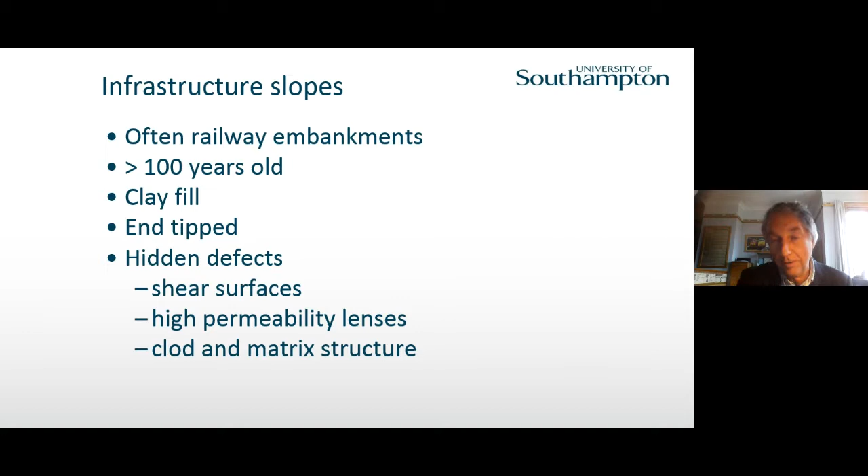They're often just end-tipped, so they were never compacted or built in layers or anything like that. And they have hidden defects, which could include shear surfaces, high permeability lenses or regions. And they also have what we call a clod and matrix structure, which I will illustrate in just a couple of slides' time.

Now, very often the material that had been excavated is dug up in clods. So the structure of the embankment often comprises these reasonably intact lumps of clay, pretty much as dug up. But over time, that can soften and swell at the edges. So you end up with the lumps of intact clay sitting in a kind of sea of what we sometimes call matrix material, which is generally softer and possibly wetter.

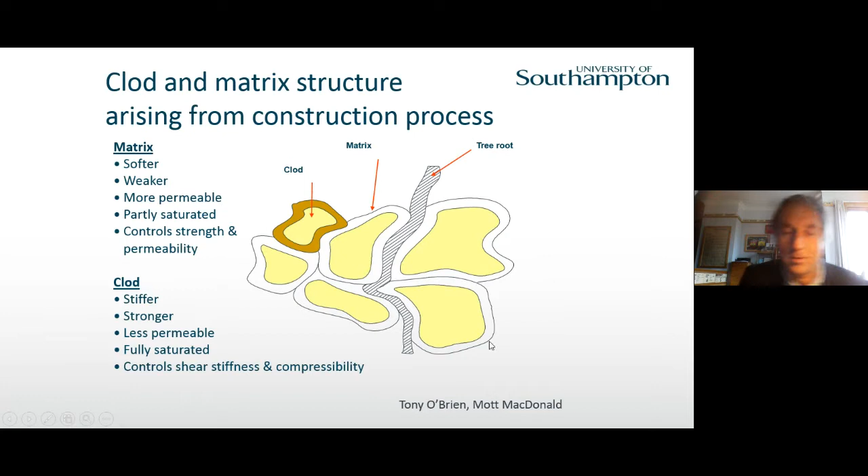It can act as a conduit for fluid flow, so that can be a high permeability zone, and also tree roots will tend to preferentially penetrate through the softer matrix material. I think this terminology was first developed by Tony O'Brien from Mott MacDonald.

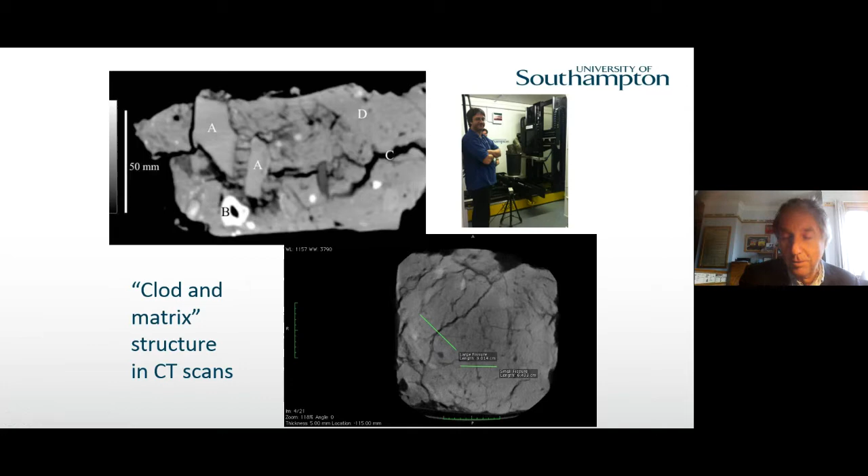So that makes some sampling and characterization of the material quite difficult. That's my colleague Ian Sinclair, who operates the big scanning machine, which is used to investigate the structure using CT scanning. So it's reasonably well known - work's been done at Imperial College and elsewhere, looking at progressive failure and deep-seated slips.

This is a classic slope failure, where an embankment slope or a cutting slope that is over-steep can develop what's sometimes called progressive failure. What happens is where the clay material exhibits a peak strength, some of it becomes overstressed, and as the material continues to strain, it loses strength, which means it sheds load onto adjacent bits of material.

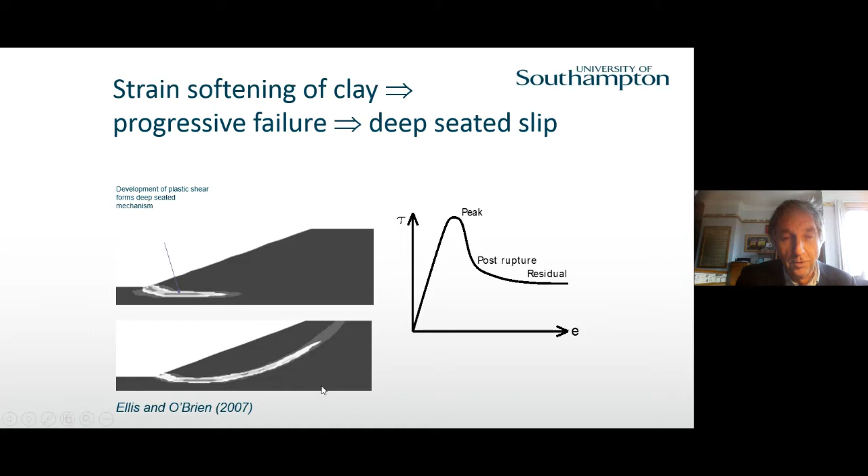So over a period of years, with small movements, we can see that a slip surface will gradually progress until eventually we've reduced the strength because we're beyond the peak across the whole of the rupture surface, and at that point you can begin to get a failure.

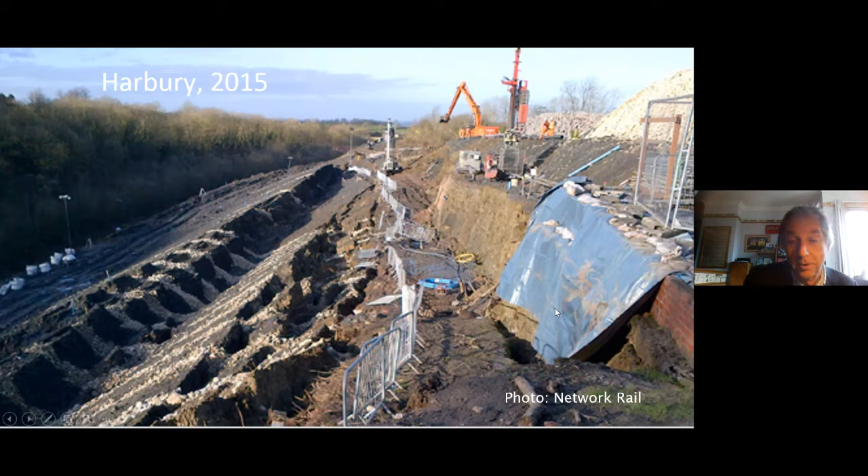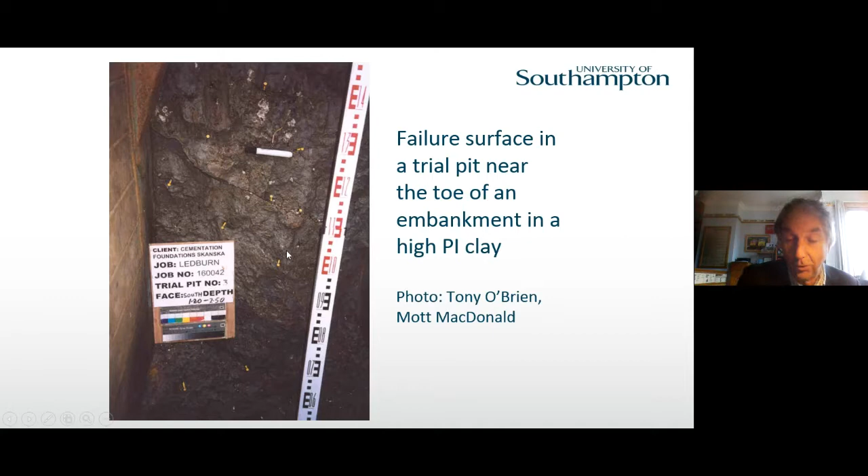This is from a trial pit near the toe of an embankment in high plasticity clay. Again, we can see there is a failure surface, which could well be a residual surface. Whether that's still active or not is not necessarily clear. So we end up with all of these internal flaws and structures within these clay fill embankments.

Those classic failures are reasonably well known. I think what is now better known than it was maybe 10 years ago is that with seasonal variations in weather patterns, but especially in the uptake and evapotranspiration of water by vegetation, what we see are potentially very significant variations in the water content of clay soils.

So this is some data from a cutting in London clay on a road at Newbury for the Newbury bypass. It covers a period of about 5 years, but in fact we've got about 15 years worth of continuous data on this site.

This shows the volumetric moisture content as a function of time, measured by time domain reflectometry theta probes, at different depths. What we see is that with the shallow ones down at 0.3, then 0.45 and 0.6 meters depth, we get these cycles of seasonal drying during the summer and wetting during the winter.

That effect reduces with depth. At the deeper ones, 0.9 meters and 1.5 meter depth, we're not seeing too much of the effect at all. But certainly over the top meter or so of soil, and this was a grass covered slope, we're seeing generally very significant drying out in the summer, then wetting up in the winter.

And then you can start to see that not all years are the same. So we had 4 years here where there was quite a significant drying out in the summer, but then a couple of years where the summer drying didn't really happen. They were probably not particularly great summers back in 2007 and 2008.

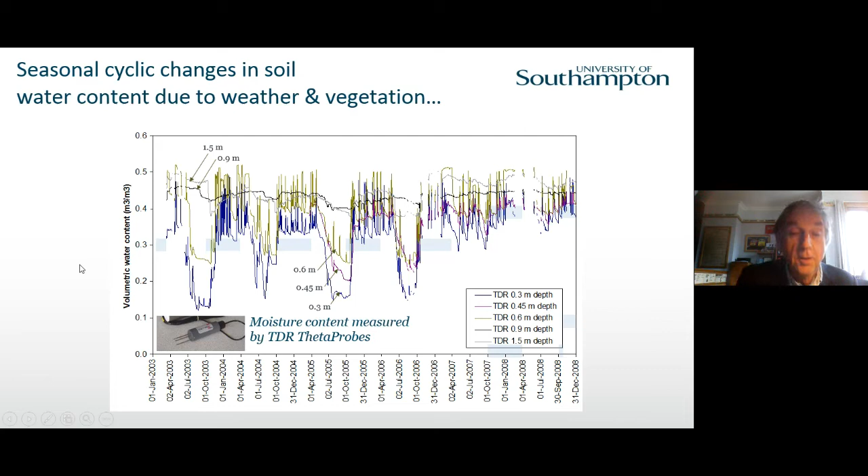So the problem with that kind of shrinkage and swelling is that while it might not cause imminent collapse of the earthwork, it is a real operational nuisance.

So even though it might not be an issue in terms of causing immediate failure, that seasonal shrinkage and swelling is very problematic. Certainly on the Wessex route down from Waterloo to Southampton, over the past few years, there have been summer speed restrictions as a result of seasonal drying out and disturbance to the top of the railway line. So it is very much a nuisance.

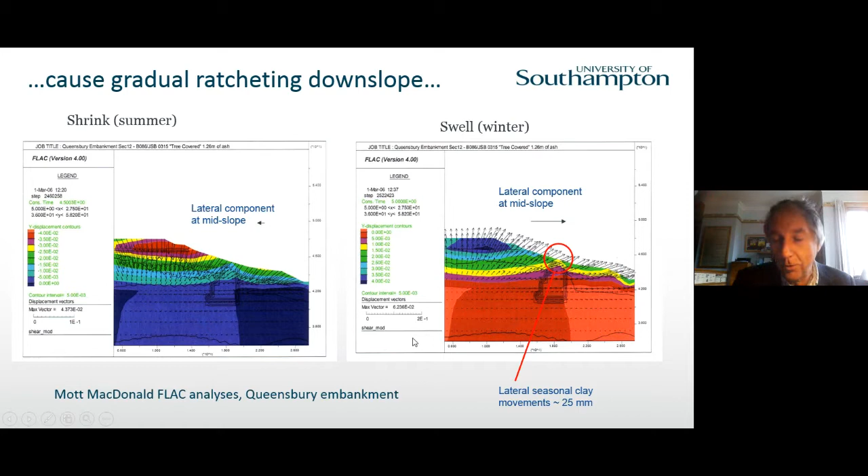During the summer, we tend to get predominantly downward movement with a very small lateral component inward. But then in the winter, when the embankment wets up, it tends to have a higher component of lateral movement, so that the downslope movement in the winter is greater than the upslope movement in the summer. So we end up with this gradual sort of ratcheting of the slope potentially down the hill.

And of course, in the summer we tend to have low pore water pressures. In the winter, when the vegetation is not taking so much moisture out of the soil and the water content is higher, that's also associated with higher pore water pressures. And as we all know from soil mechanics, that means it's quite damaging for the stability of the slope.

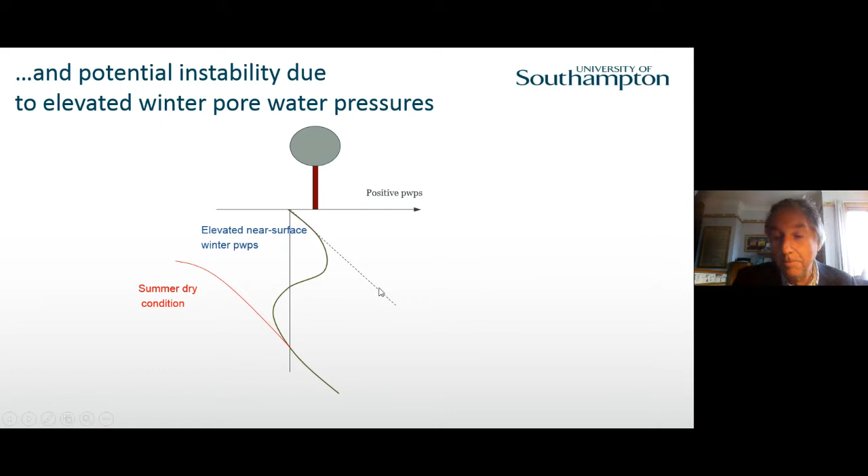So there is also the possibility that these elevated pore water pressures in the winter, with the water table near the surface, could trigger a slope failure, such as the ones that we saw on the earlier pictures.

So the first piece of work that I'd really like to go into in a bit more detail is some work that we did looking at the wet winter pore water pressures. In some respects, just getting a handle on all of that long time series data from Newbury and from other sites is important, because you can begin to see what kind of variation we get.

And you realise that not all winters are equal. The worst condition is where you don't get the drying out in the summer. So you would have, for example, a wet summer, a wet winter. Then if you have another wet summer and another wet winter, you start to get really quite onerous pore water pressures in the earthwork.

So this is just a reminder, this is the Harbury failure, that high pore water pressures reduce the stability of the slope, so we can get the failure that we've seen here.

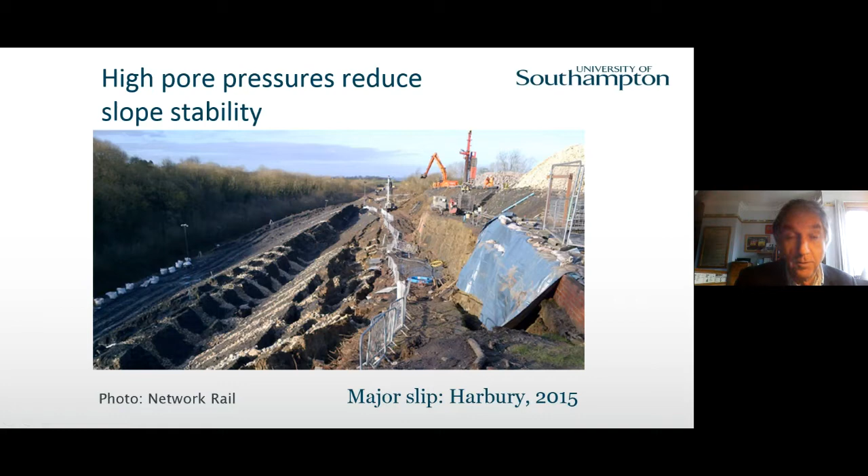These are pore water pressures plotted against depth. These were measured by Andrew Ridley in a number of London Underground embankments, in the wet winter of 2000-2001. There's a variety of different sites, and it's just the maximum recorded pore water pressure as a function of depth below the clay surface.

If you look at all of the data, it looks like a bit of a measles plot. But if you had to put a worst case through that, you would say it's hydrostatic. So in fact, the London Underground default pore water pressure conditions in an embankment in the winter is hydrostatic below groundwater table up at the surface.

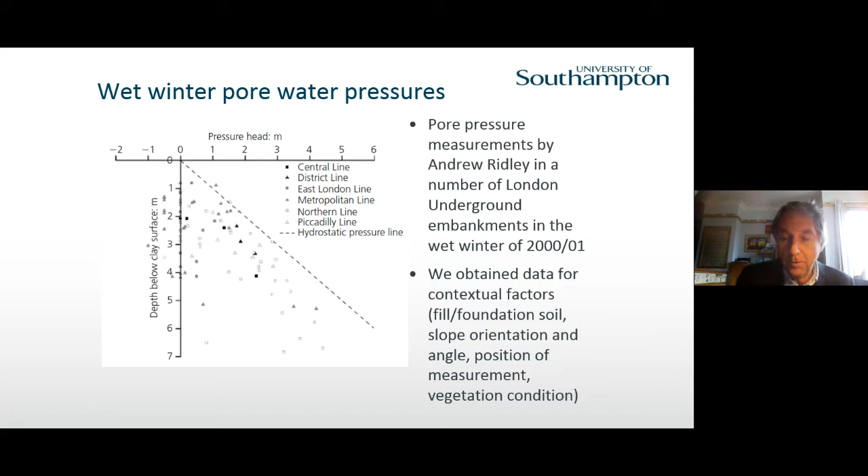But it's worth looking at the data a little bit more closely. So obtaining contextual factors, looking at things like what the fill is made of, what the foundation material is, and even down to the slope orientation and slope angle, we can start to get a little bit more richness out of the data.

The most important one was the effect of the boundary condition at the base of the embankment. If the embankment was on London clay, we did generally get pretty high pore water pressures in the winter. The hydrostatic line from the surface is the one which is dotted. The worst case scenario would be perhaps this bilinear distribution, and most of those measured pore water pressures where the foundations are on London clay are actually getting up towards that boundary.

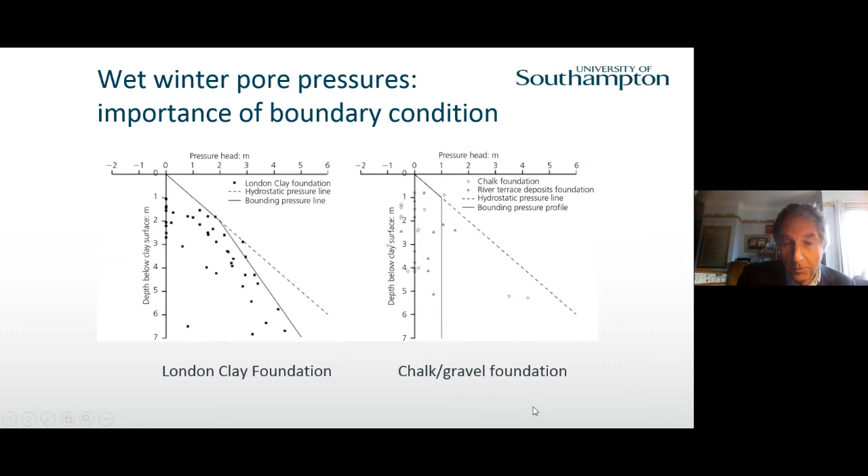But if we now separate out the embankments on a chalk or gravel foundation, which is much more highly permeable than the clay embankment, allowing the possibility of downward drainage into the chalk foundation, we see that those pore water pressures are generally very much lower. So in fact, the influence of the foundation of the embankment is very significant.

To investigate that a little bit more, we carried out some simple analysis. It's just one-dimensional flow, but it does do unsaturated flow. It was using the program VADOSE/W, so we didn't have any components of cross flow, and we were just looking at where the pore water pressures would get to as a result of rainfall and evapotranspiration associated with grass, applied after an initialization period using measured weather patterns for 2000 and 2001. We applied the rainfall and evapotranspiration at the top of the columns.

That represents a 1 in 100 year wet winter with that data. We looked at some different scenarios, and the question was where do we get to with the winter pore water pressures in this case. It's as if we're looking at a vertical here through a point about halfway down the embankment.

Model A had a high permeability surface clay fill, representing the effects of desiccation, for example, which does seem to be the case. It's difficult to model what you measure in reality without having a high permeability surface layer. So all of the models had a high permeability surface layer.

In model A, the 4 meter high representative embankment was made of fill with permeability 5 times 10 to the minus 8 meters per second, sitting on a well-drained foundation of chalk or gravel with permeability 3 orders of magnitude greater, at 5 times 10 to the minus 5. Model B was the same, except it was sitting on a London clay foundation, with foundation permeability of 5 times 10 to the minus 9 meters per second.

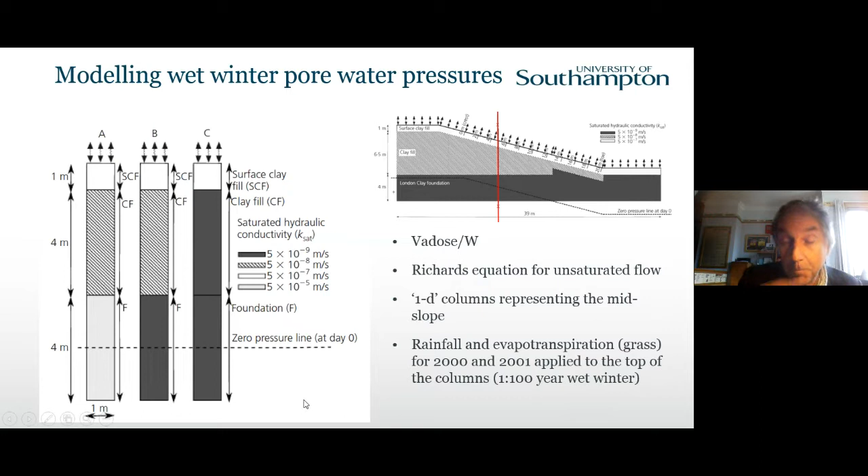Model C had both the embankment made of low permeability clay as well as the foundation, both at 5 times 10 to the minus 9. The line of zero pore water pressure was 2 meters below what was considered to be original ground level. Then the VADOSE model was run.

At the end of that, we can see that the wet winter pore water pressures in model A, the underdrained embankment, are generally fairly close to zero, except perhaps over the top couple of meters. Model B, the embankment founded on clay, is indeed fairly close to hydrostatic. But interestingly, model C, the low permeability embankment, is such a low permeability that nothing really very much happens.

So the precipitation in the winter never really penetrates into the body of the embankment. So that is also good.

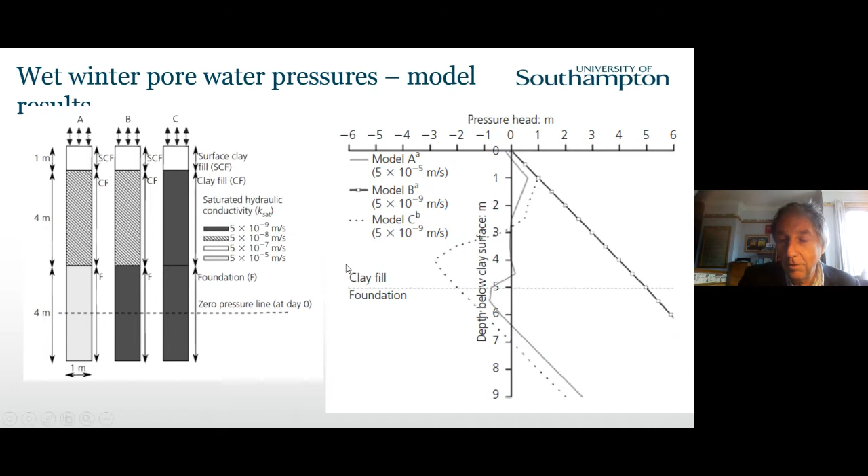In many respects, what this shows is that the worst thing we can really have is an intermediate permeability embankment on a low permeability foundation. If we can give the embankment a high permeability foundation, so it's underdrained, or we can make the embankment really solid so it's well compacted and of low permeability, that is also good.

That is good for controlling the wet winter pore water pressures. How does that compare with the data? We've replotted the data here, again this is Andrew Ridley's data. So these are the slopes with the London Clay foundation with the result of the model, which represents an upper bound, maybe not the best upper bound. And then these are the results of the chalk foundation, which again are a bit higher than the model, but generally we can see that we're explaining the right kind of trends with that simple model.

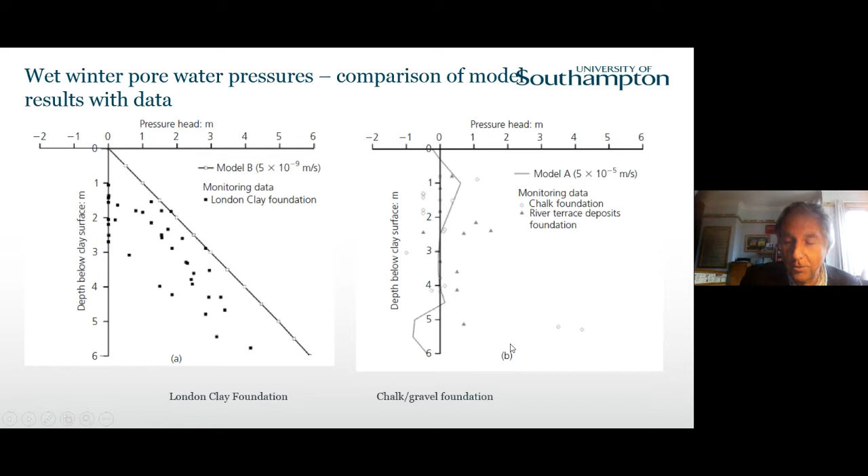So in summary, what we've seen is that pore water pressures can remain low in embankments underdrained by a chalk or gravel foundation, even during an extreme wet winter. That was a 1 in 100 year winter that we looked at. A fill of permeability 5 times 10 to the minus 9 meters per second or less will prevent rainfall from entering, and again the pore water pressures remain low.

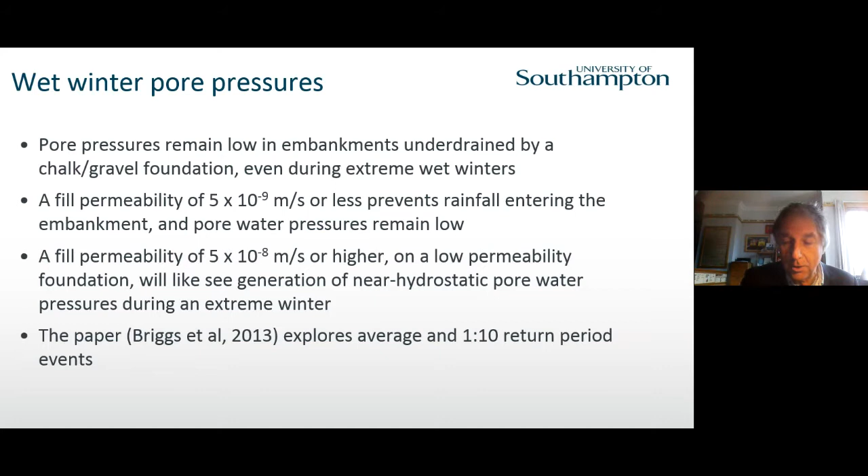And the worst thing is really a fill of permeability which is 5 times 10 to the minus 8 meters per second or higher on a low permeability foundation, which will give us the generation of near hydrostatic pore pressures during an extreme winter. The paper I mentioned explores a wider range of scenarios than that, but that's the key message.

Okay, next topic is the effect of trees. There's a couple of papers where some of this work has now been published. Trees are, on the one hand, good because they can keep winter pore pressures low. The previous one we were looking at was just a grass or shrub covered embankment.

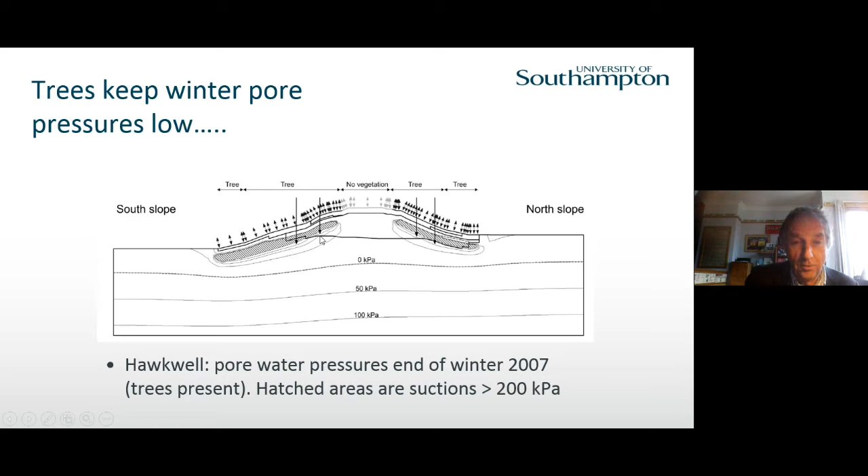These are some numerical results, and the hatched areas are zones of suction which remain even at the end of a wet winter with trees present. Those zones of suction, in excess of 200 kilopascals, are obviously going to be doing quite a lot in terms of helping keep the embankment stable.

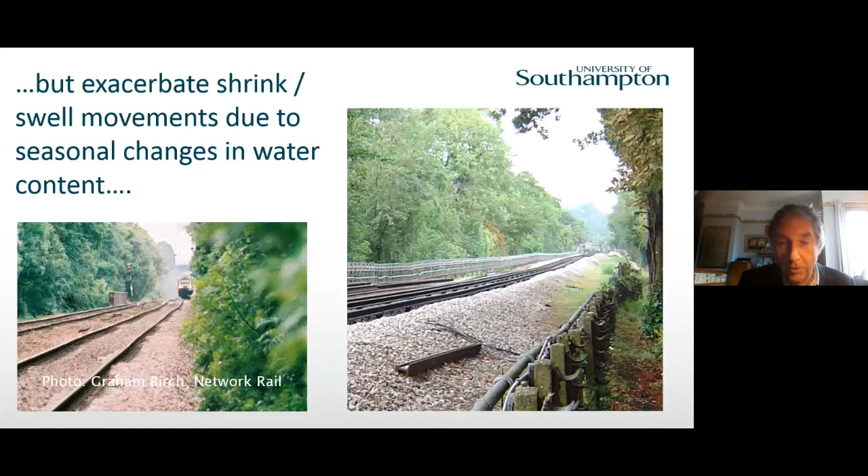But again, the problem with trees is that they do exacerbate the shrink swell movements, which are such an operational nuisance, as we talked about earlier on.

I've got a few bits of data to share from an experiment carried out by Network Rail at an embankment called Magnolia Road in Southend. It's quite interesting to see the underlying clay fill, the embankment fill here, and how much that has settled over the years and had to be topped up with ash, as we can see from here.

In this location we installed a number of inclinometers to look at downward movement of the slopes. We had a number of extensometers so we could look at the settlement or the heave at different depths. We had some of Andrew Ridley's geopiezometers, so again we did this work in collaboration with Andrew Ridley, and we also had some neutron probe access tubes. The neutron probe we used to measure the volumetric moisture content of the soil.

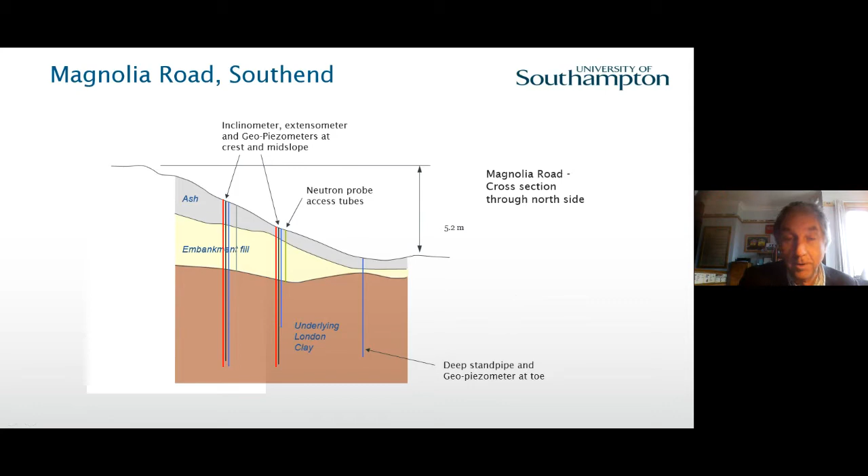The embankment was originally covered in mature trees, so we can get a feeling for the extent of the vegetation as in the picture at the back. It's generally fairly low annual average rainfall, being in Essex. Some of the trees were removed in March 2007, and then they were all removed in March 2010.

So if we look at the heave of the embankment measured by the magnet extensometers, for the initial period, what we're seeing is that over the summer, getting into July, September, the embankment settles, and the settlement measured up at the surface actually reached 40 millimeters here, at a depth of 1.14 meters. And then with increasing depth, the settlement reduces.

The orange line here is at a depth of 7.6 meters, where not much happened. So what happens is that summer comes along, the trees extract water from the soil, and then in winter the soil wets up. At this point, we would normally expect the cycle to repeat itself and get another summer dip, but the trees had been removed.

So what happened was that instead of the shrinkage, we saw a swelling, as evidenced by the extensometer devices. The swelling increased and then it seemed to stabilize, but then it continued again, and then we're back to some cycles, possibly as the vegetation reestablishes itself. So the effect of taking out the trees means that we've taken out these annual cycles of shrinkage, but on the other hand we've got a long-term swelling.

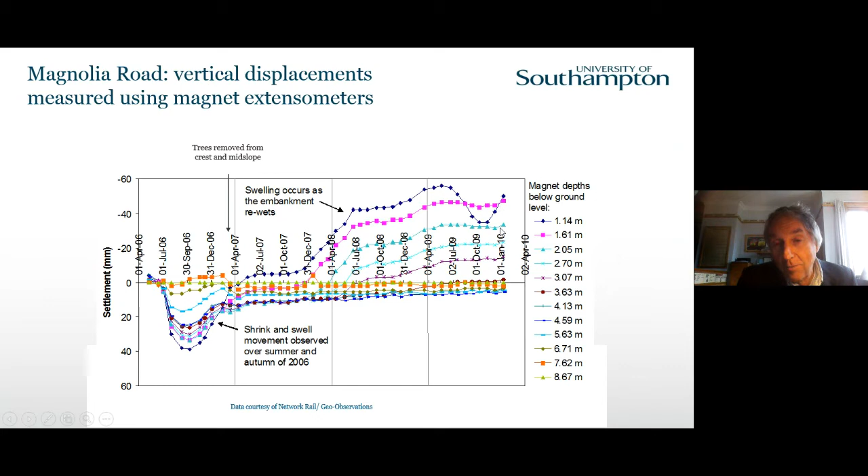And of course, this long-term swelling is going to be associated with an increase in water content and hence pore water pressure. And that's affecting a depth down to something like 3.5, 4 meters, if we look at the data over on the far right.

So the neutron probes enabled us to measure the volumetric water content with depth. It started off down here with this bottom line, that orange one. Then once the trees had been removed, we could see the embankment fill wetting up from the surface, with typical moisture content versus depth profiles coming like that, and then moving across, and gradually the wetting up profile increased in depth down to the bottom of the fill at a depth of 4 meters.

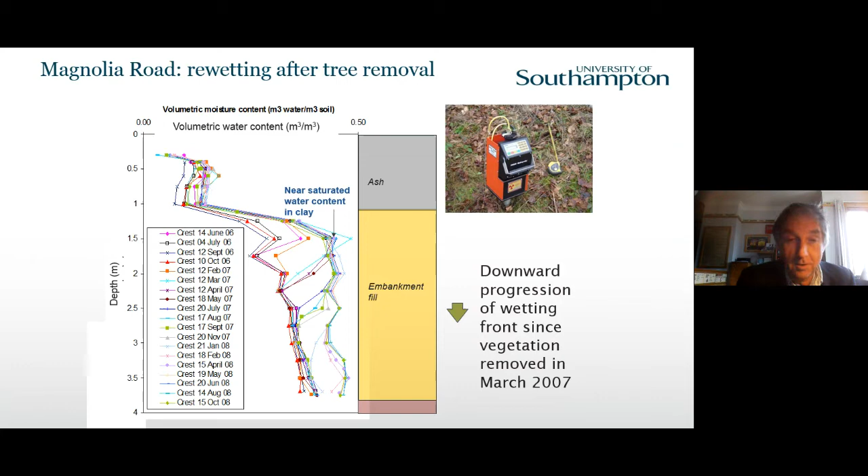So there is no doubt that the removal of the trees was associated with a gradual rise in the equilibrium water content, and therefore also in the pore water pressures of the embankment fill. Now, tree removal is truly draconian.

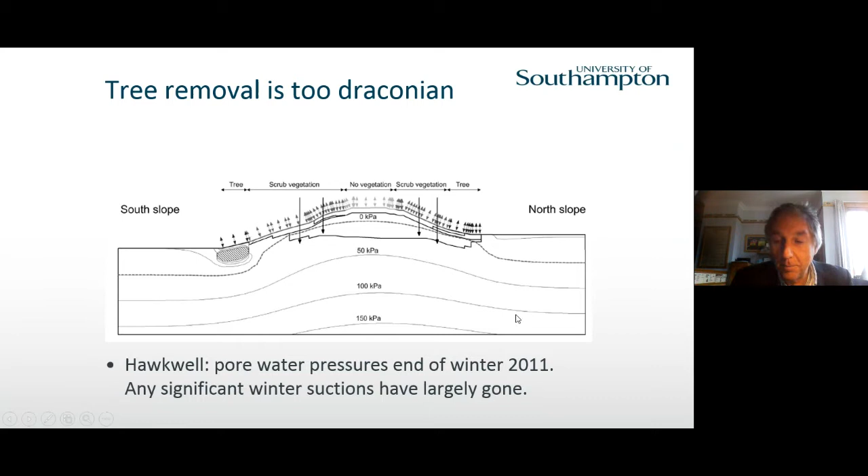And that probably looks like a reasonable way of managing the vegetation, if that can be done, because it means we've got the trees away from the railway line and they have taken out the worst of the shrink swell, but they're still giving us a degree of wet winter suctions, which will help with the stability of the slope.

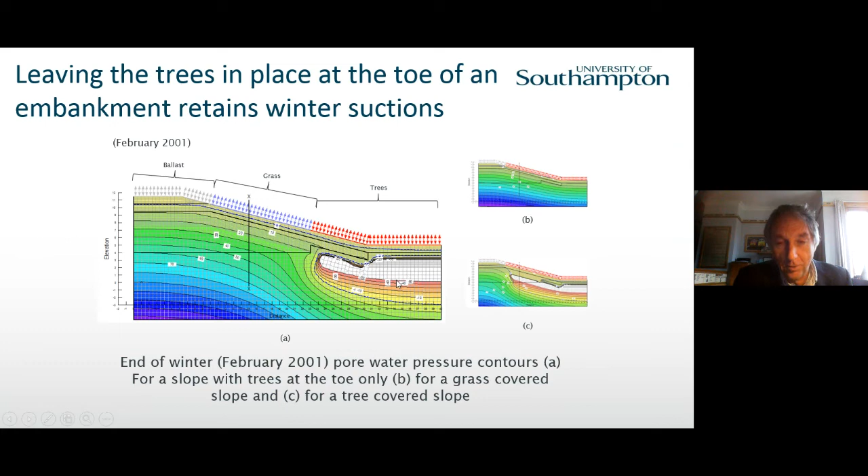So the messages there are that modest, controlled grass or small shrub type vegetation on slopes is a good thing because it lowers winter pore water pressures. The roots may also have a binding effect, but we've not looked at that in this work.

And then secondly, high water demand tree species need to be avoided, especially within 1.5 times the tree height of the railway. The trouble is that often puts them outside railway land and beyond the control of the infrastructure owner. So trees do remain a problem, not least because they tend to fall on the track and trains can run into them. But vegetation management does seem to be quite key to controlling pore water pressures in those slopes.

Okay, so the next topic is going to be on slope stabilization using discrete piles. So we can try to stabilize infrastructure slopes using a variety of methods. Sometimes we might put in a complete contiguous or continuous retaining wall.

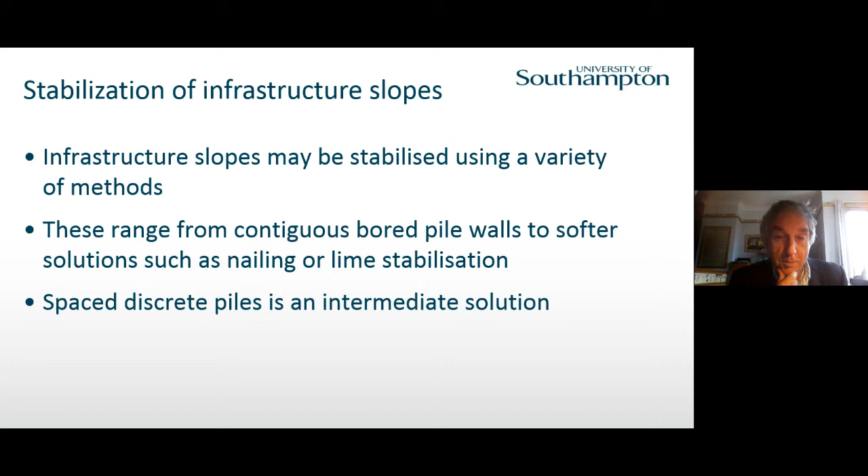We might try a softer solution such as nailing or lime stabilization, but spaced discrete piles is a sort of intermediate solution. What I mean by that is that we put these piles in usually about midway down the slope. The idea is that they're far enough apart that they're not continuous, but close enough together that we don't get flow through of soil in between the piles.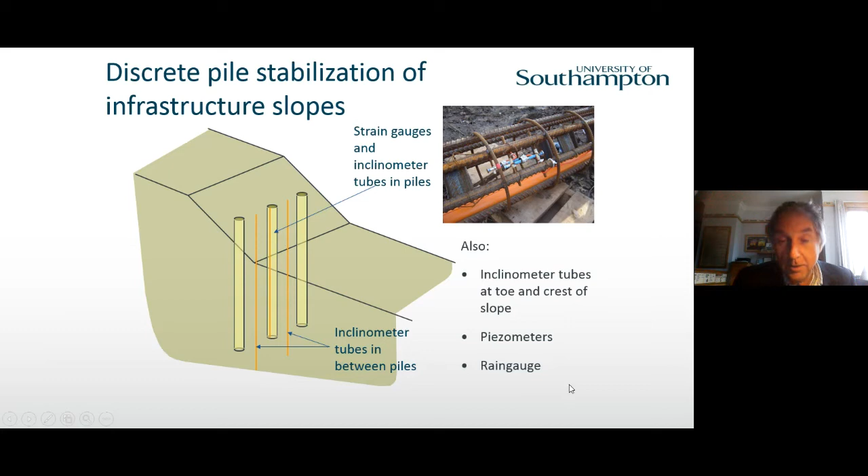We got a number of sites where we monitored pile stabilization schemes to try to shed some light on a number of unknowns. Typically, our instrumentation would consist of strain gauges inside the piles to measure bending moments, inclinometers inside the piles to pick up pile movements, and also inclinometers in the soil, either between the piles or upslope or downslope, so we can see how much that is moving. In addition, we'd try to have piezometers and a rain gauge, so we can look at the influence of weather and vegetation on what's going on.

There were a number of uncertainties about these discrete piles over the mechanisms of behaviour and the appropriate method of analysis, especially when installed in slopes where there might not be an obvious failure surface. There are other questions such as how far apart they need to be, where in the slope, what depth, bending strength and stiffness - I'm not going to cover those last three much in this talk.

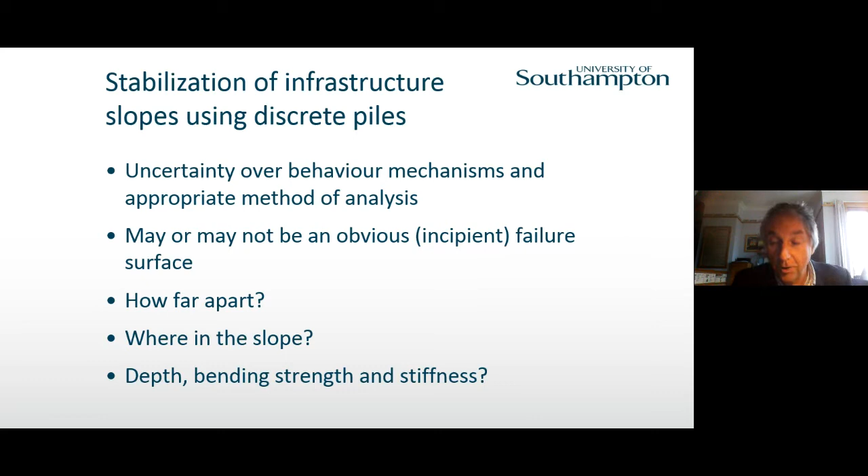The field studies we have on pile stabilisation are at Grange Hill, Mill Hill and Hildenborough. I've talked about Magnolia Road, which is the one at Southend - that was the vegetation, tree removal experiment - and I've also mentioned Newbury. So those are some of the sites we look after in the southeast of England.

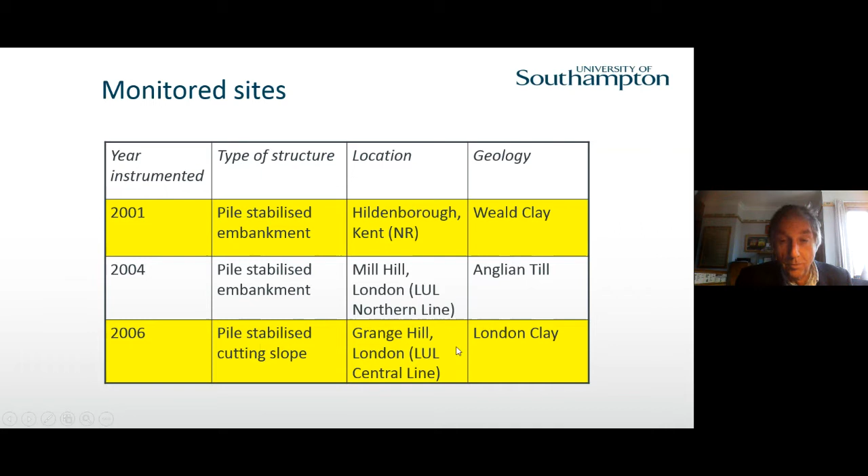These are the three sites we're going to talk about with pile stabilisation. There's an embankment at Hildenborough in Kent, in Weald Clay. There's another embankment at Mill Hill, which is in Anglian Till, on London Underground. And then there's a slope at Grange Hill in London Clay, on the Central Line.

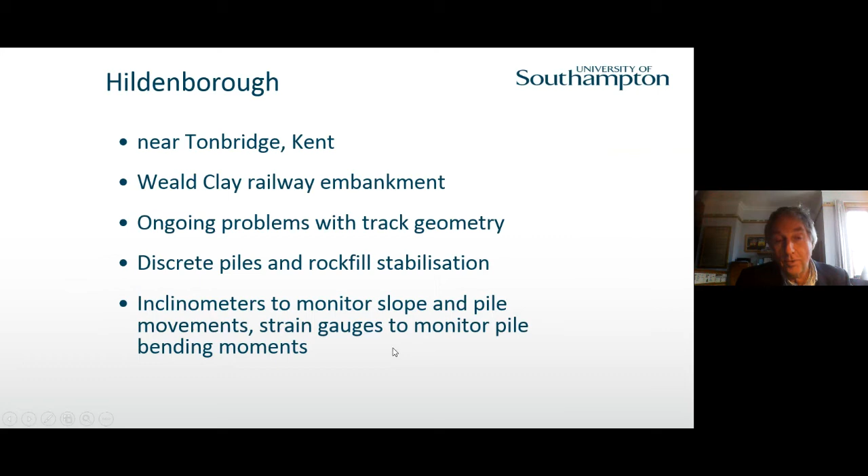Hildenborough had ongoing problems with track geometry, and the approach there was to install discrete piles, but also a layer of rock fill on the surface of the slope. Our instrumentation included inclinometers to monitor slope and pile movements, and strain gauges to monitor pile bending moments.

So this was the proposed remediation. This is the slope geometry during pile installation - they cut back the original slope. It's basically Weald Clay over weathered Weald Clay and intact Weald Clay. The piling platform was built out of imported rock fill.

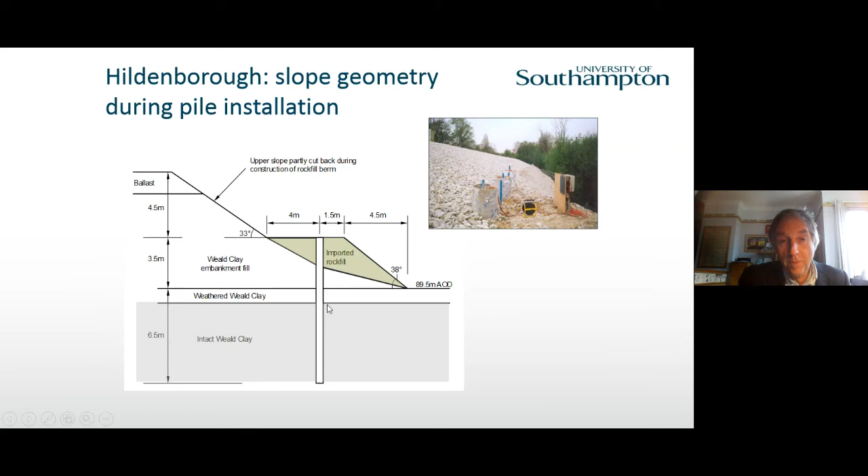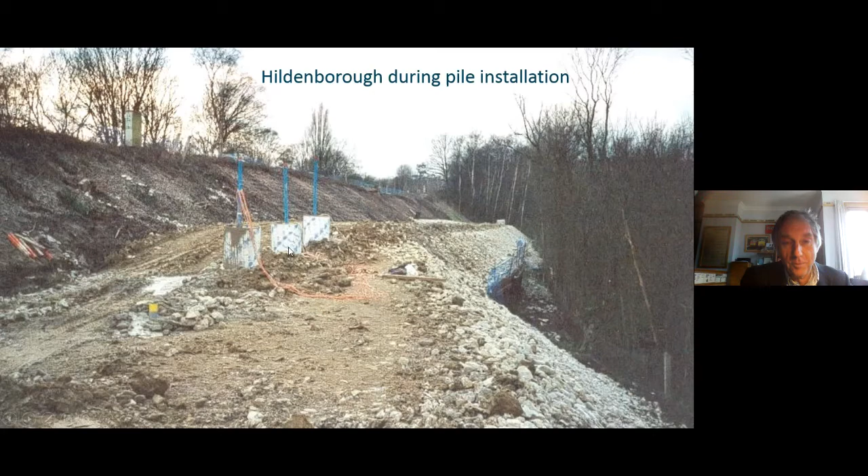The piles were installed, and that's a picture top right during pile installation. That's just a bigger view of that picture, showing the piling platform. Those are our inclinometers, which are protected by those casings to stop them being knocked over.

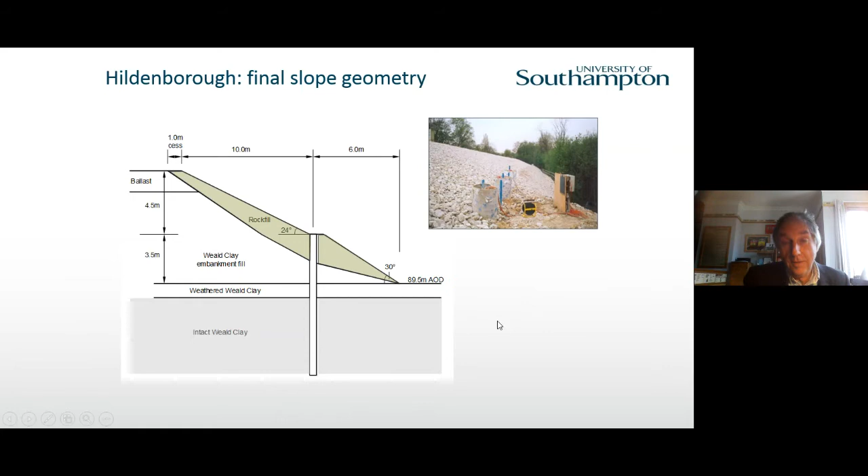Eventually the slope was regraded, so there's this quite substantial rock fill cover with the stabilizing piles in here, shown in this picture. That's a close-up or zoomed-out view showing the instrumentation with the piles and the instrument cabin, and you can see the rock fill quite clearly.

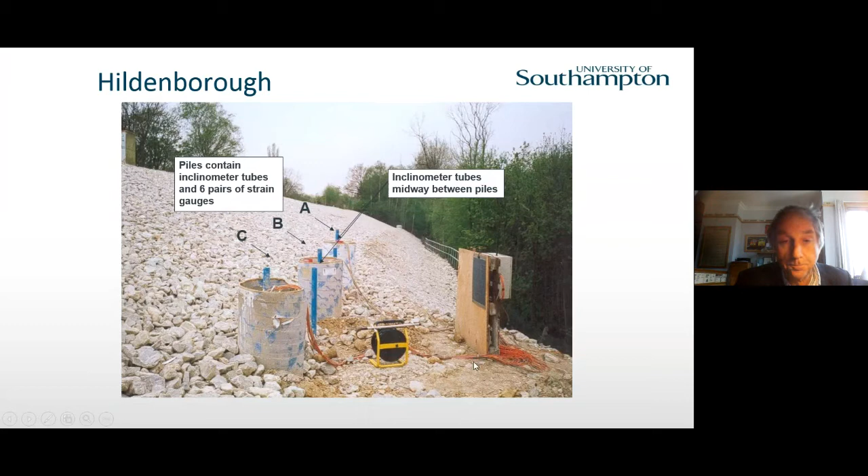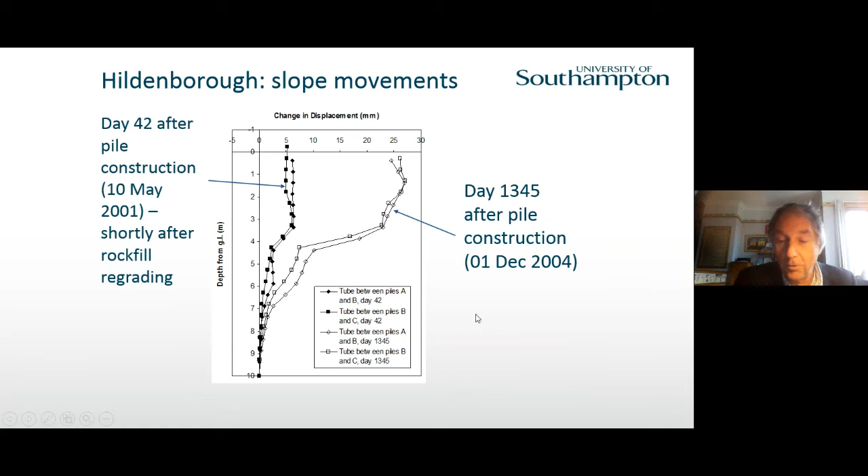We're not going to look at the bending moments, just some of the movements. This shows the movement of the slope. These black ones are the tube between piles A and B shortly after installation. The open symbols are the tube in the slope between the piles, after about 3 years. We can see the piles haven't stopped the movement completely, although it's a lot less than it was - we're beginning to see the kind of movement of the slopes we're getting. These are the corresponding pile movements.

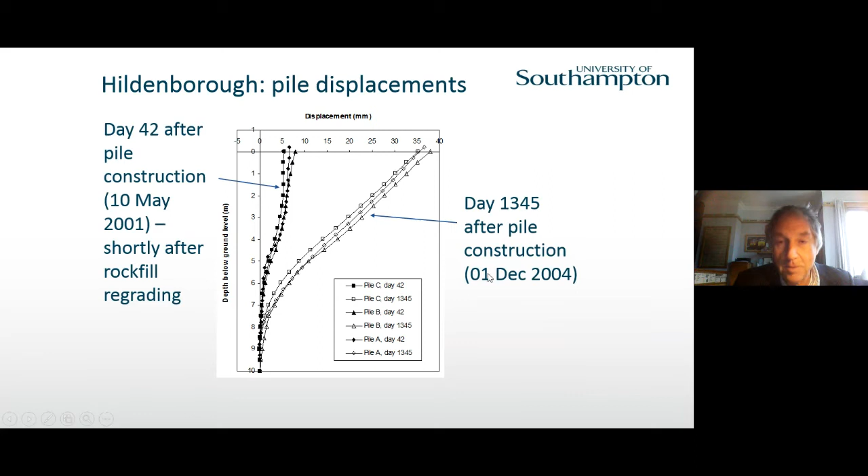We can see the piles are actually moving a fair bit, about 5 millimeters after 42 days, up to 35 millimeters here. Those are the deflected profiles with depth of the 3 piles in the short term and the long term. The interesting thing is the relative movement between the piles and the soil. If we take examples at the early stage, day 42, we've got the pile in solid symbols and the soil in open symbols. After 3 years, we've got the same - the pile in solid symbols, the soil in open symbols.

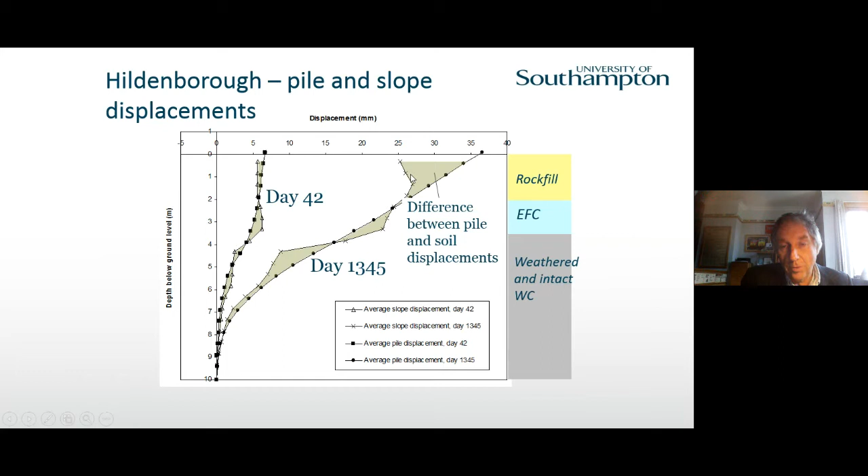What's interesting is that up at the top here, we can see the pile is actually moving further than the soil. But remember that this upper layer of soil is rock fill, which is pretty stiff. So this tells us the relative patterns of pile and slope movement: the pile moves more than the soil at the top, then it swaps over, and swaps over again. That all seems rather odd.

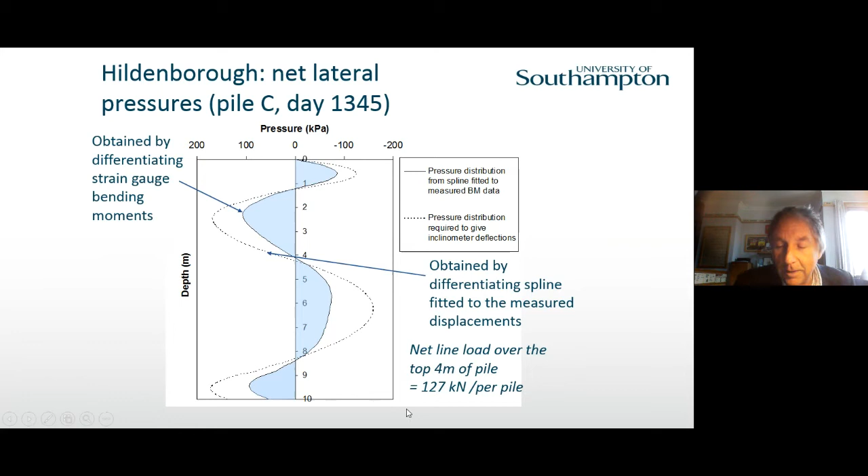It's actually confirmed by the inferred net lateral pressures, obtained by differentiating the appropriate number of times the bending moments from the strain gauges, or a spline fitted to the measured displacements. That seems to show upslope pressure, downslope pressure, upslope pressure, downslope pressure. Again, that seems slightly unusual.

But if we think about a mechanism of behaviour, even though a slip surface might not have fully formed, maybe that gives us a clue as to how the movements are occurring. If we think about the movements associated with rotation of this mass of soil about a fixed point, for a given angle of rotation the movements are perpendicular to the radius and proportional to the distance from the centre.

So along a vertical line that might represent the pile, we can pick up this expected pattern of soil movement associated with the development of a rotational pattern. But the pile, if it's stiff, is going to essentially rotate about a point near the toe. So the pile does something like that.

What that tells us is that because of the stiffness of the pile, we probably get the pile moving further than the soil at the top, then it swaps over, then swaps over, then swaps over again. So thinking about the mechanisms would give us this pattern of upslope, downslope pressures on the pile.

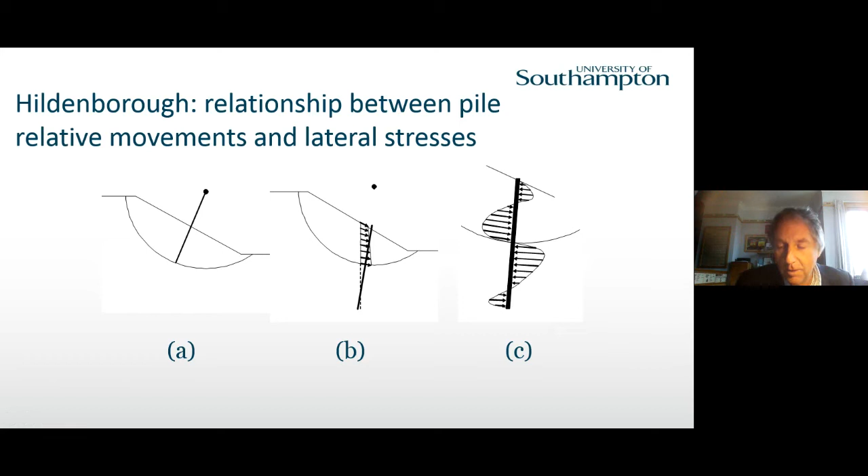And that actually does match what we picked up from the measured displacements and bending moments.

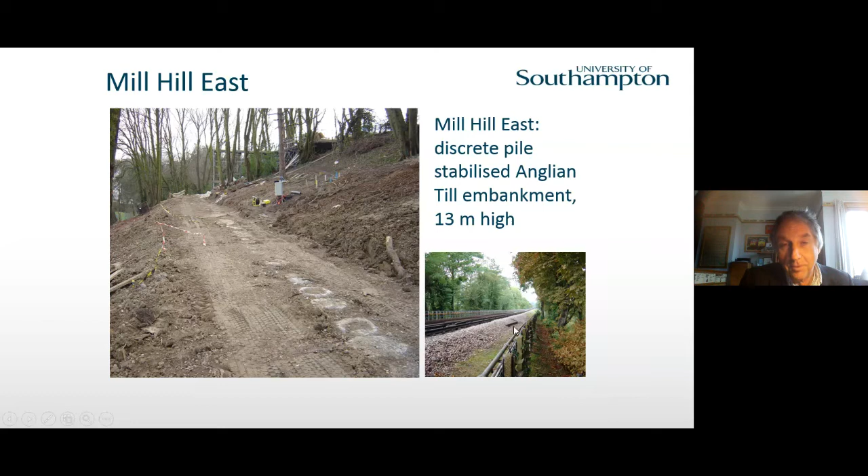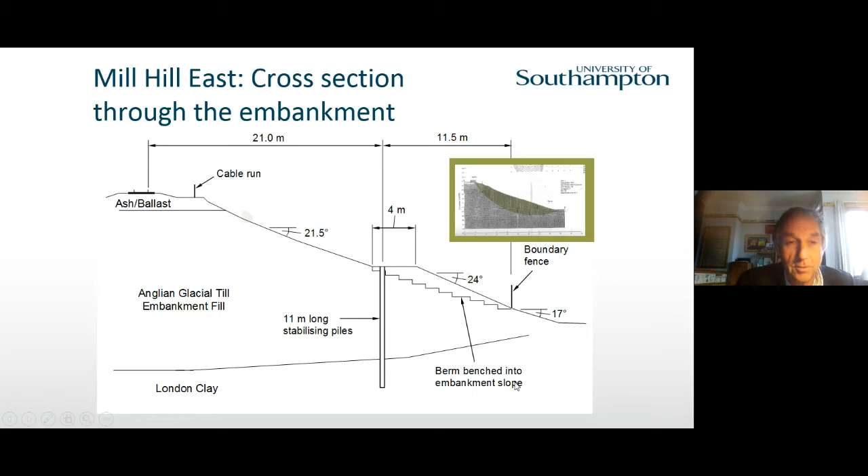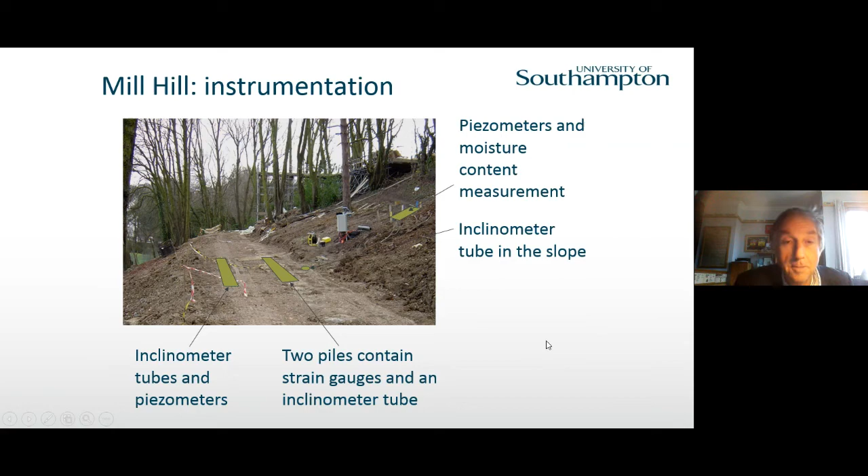This is another view showing the instrumentation: inclinometer tubes and piezometers. Two piles have strain gauges and an inclinometer tube within the piles. We also had piezometers, moisture content measurement, and inclinometers in the slope. But again, I'm really just going to focus on the relative pattern of soil and pile displacement.

This is what the site looked like after the instrumentation had been installed and tidied up. Initially we'll just look at one pile, pile C. Initially it actually apparently moved back into the embankment—it started off here, moved back into the embankment, and then started to move down slope.

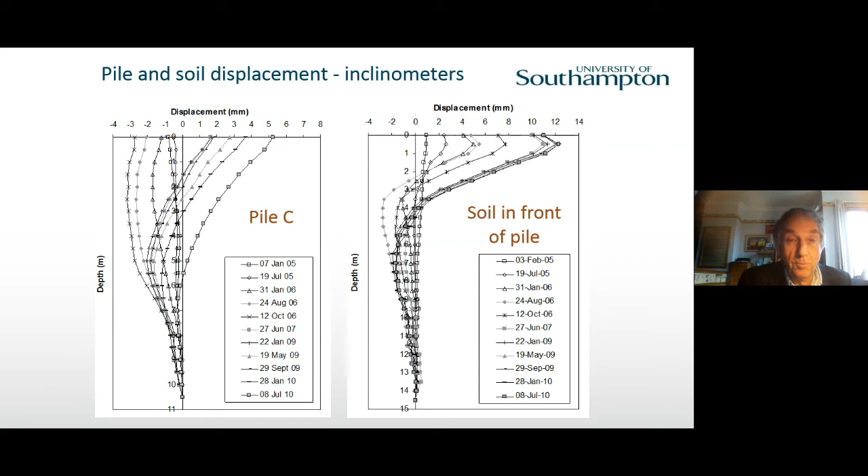The soil in front of the pile behaved itself possibly a little better, just gradually moving down slope. This movement of the pile back into the embankment was apparently quite curious, but in the end it looked like that was associated with a general removal of water from the embankment by the vegetation. You'll notice it's still covered in trees, so that was probably a general shrinkage inward of the embankment before the pile really started to function as expected.

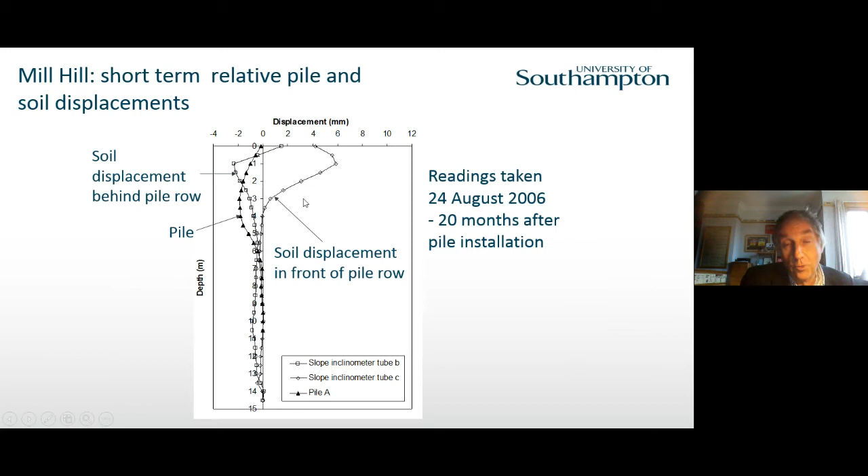We can confirm that by just looking at the pile—it has clearly gone back into the embankment. This is the soil displacement behind the pile, which again has generally shrunk backwards into the embankment. Then the soil, once we get onto the slope, has started to perhaps move down slope again like that.

After a period of 5 years, things are behaving more as we would expect, with the pile tending to bend down slope, but only a displacement of 4 or 5 millimetres. The soil displacement behind the pile is again moving down slope but generally by less, and the soil displacement in front of the pile is moving down slope but generally by more.

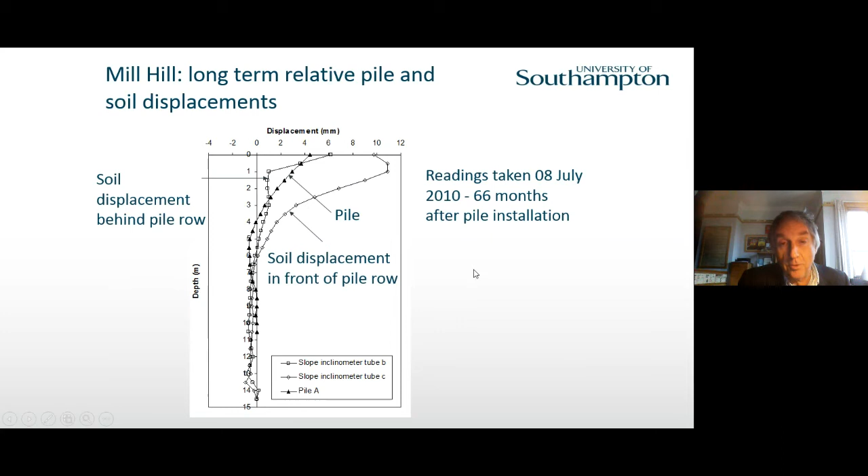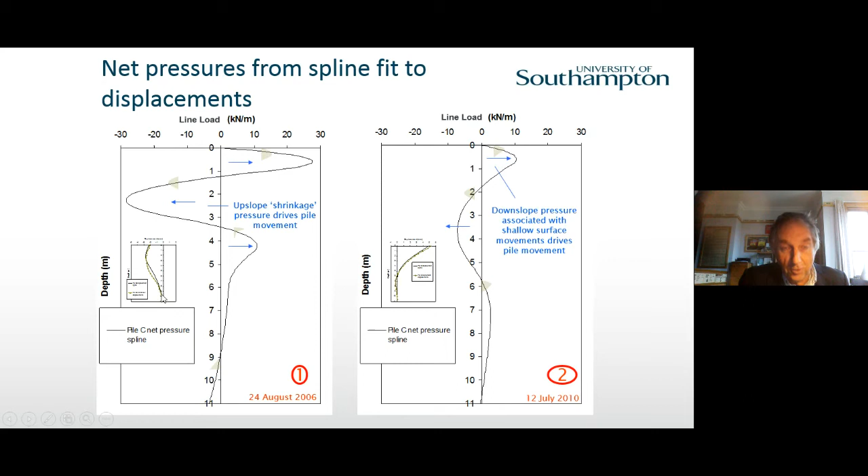If we look at the net pressures from a spline fit to the displacements, that tends to tell us that in both cases we've got downslope pressure, upslope pressure, downslope pressure, and this is probably a result of the shrinkage of the embankment driving the behaviour. But then in later times, we're getting a more expected downslope pressure, balanced by upslope pressure and downslope pressure at the bottom, where the pile is tending to bend downslope, rather than being pulled inslope by the general shrinkage of the embankment.

In terms of the relative pile-soil movement, we can idealize it like this. This is the early times, where we have the general pulling inwards of the embankment, and the pile has to deflect like this. So we've got relative movements such that the soil, even though it's all moved inwards, is relatively outwards compared with the pile. Then it's inwards, outwards, and inwards.

At longer times, the general expected downslope movement of the soil has kicked in down to a depth of about 2.5 meters. The soil wants to do this, pushing the pile with it, and the pile is embedded into the more stable soil at depth, resisting it. So those are the cartoon mechanisms of the two different types of behaviour we have.

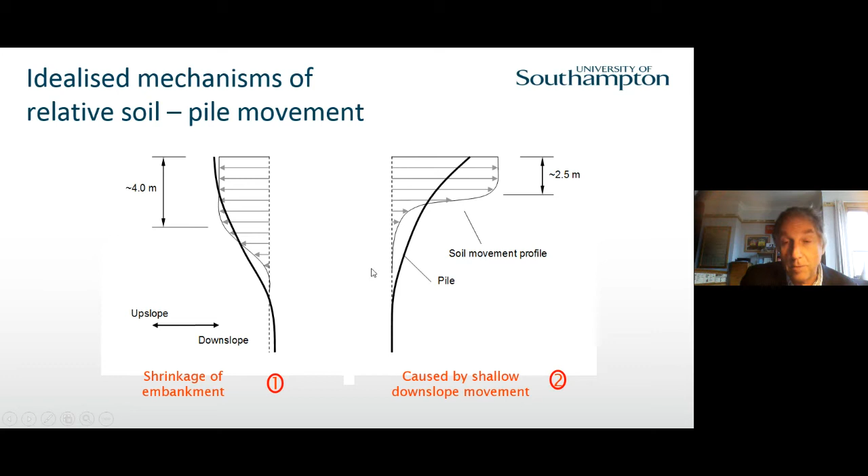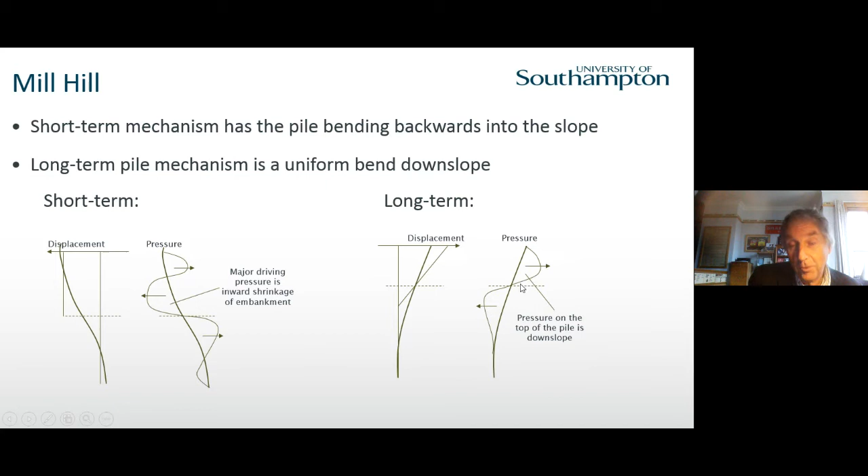Interestingly, the early behaviour is driven by the general inward shrinkage of the embankment induced by the removal of water by the vegetation. If we think about the pressure diagrams we'd expect from these idealized patterns of relative displacement, they do conform to what we measured. So that's the inward shrinkage giving a slightly more complicated pattern of loading than the longer term, where we've got downward movement of the soil resisted by the pile - downward pressure, upward pressure, and the pile being embedded in.

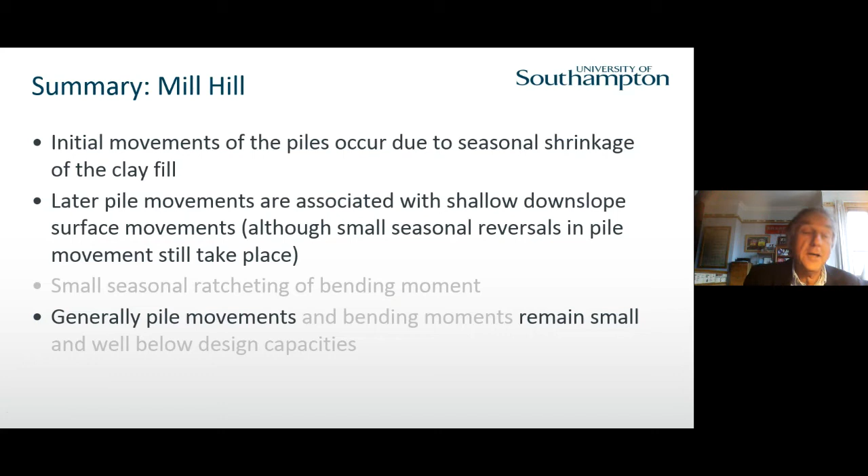The initial movements of the piles seem to occur due to seasonal shrinkage of the clay fill. The later pile movements are associated with generally shallow downslope surface movements, but we still notice small seasonal reversals in pile movement and bending moment. Generally, the pile movements have remained small.

The last one is Grange Hill. This was a cutting, prior to the remediation works, and it was adjudged to have a low factor of safety - interestingly, just on one side, because there's a cross flow of groundwater here, so the pore water pressures were much higher on one side of the cutting than the other. It's an 11-metre deep cutting, adjudged to have a low factor of safety.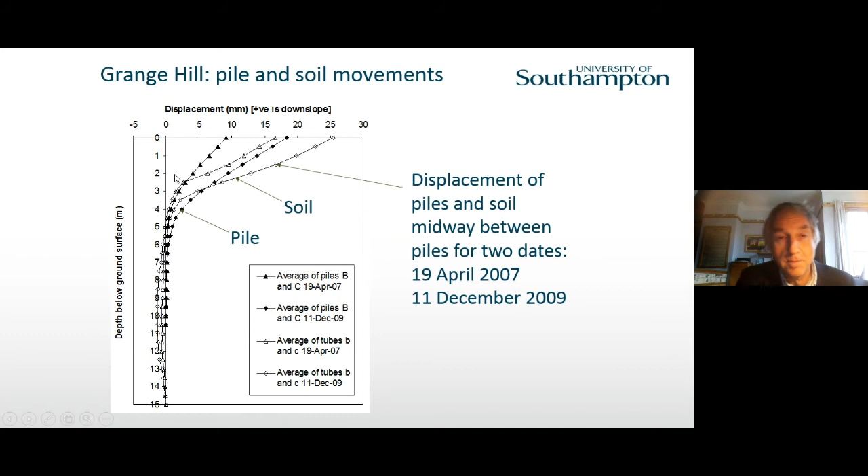In this case, we have two dates for the displacement of the pile, shown in solid, an average of two piles. This is the short-term movement, fairly shortly after installation in April, and then 2 to 2.5 years later the pile has moved to here, and the soil midway between the two piles has, as we might expect, moved a bit further than the pile. The relative movement of both is quite similar in both cases - there's just been generally more movement at the later date.

In this case, this scheme is probably behaving as we would expect. There's a general downslope movement of the upper few metres of soil, so we'd expect the soil to be doing something like this. It's not associated with a developing or almost developed slip circle like Hildenborough was - it's more of a gentle downslope movement. The pile bends being built in, so we end up with downslope pressures on the pile being resisted by upslope pressures, and that's the sort of thing we've monitored.

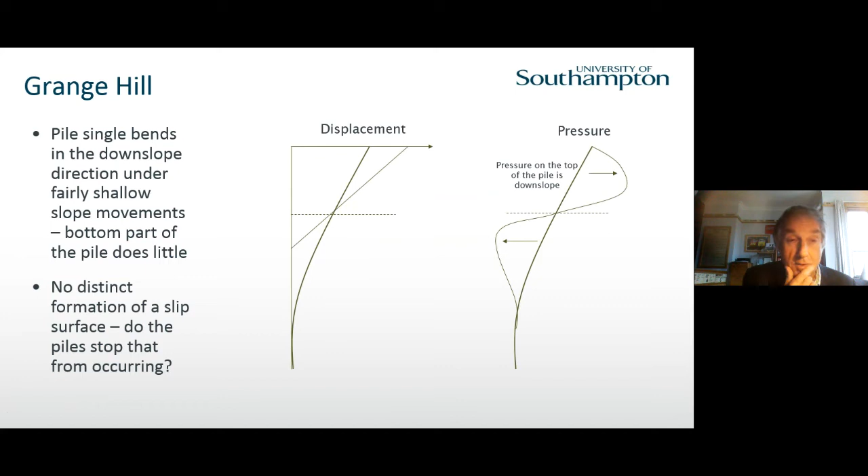In this case, there is no distinct slip surface, and it's interesting to speculate that perhaps the piles have been successful in preventing that. The last summary slide shows the rates of pile movement and the total accumulated downslope movement.

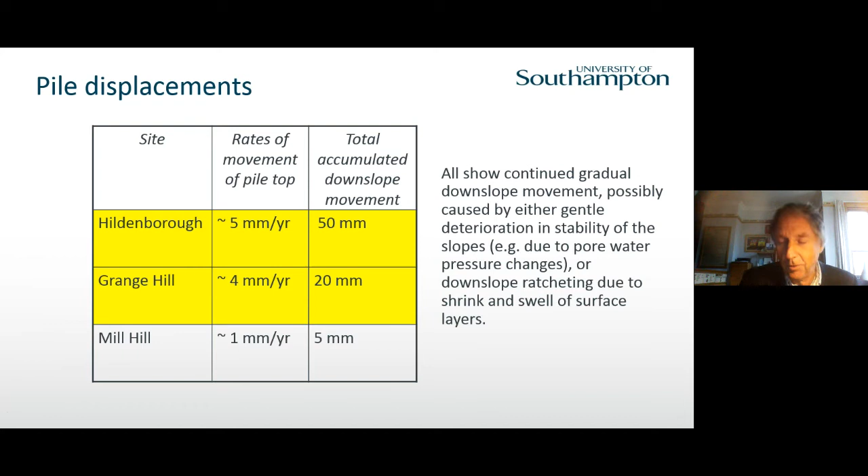So this is actually now a couple of years ago, but Hildenborough, they are still moving. We haven't stopped, things haven't been stopped completely. And that's going to play into the concluding bit of the talk. People like to think that we can build something that won't ever need maintaining, and I don't really think that's a realistic ambition. I think continued management of the vegetation and attention to maybe minor slips is probably something we have to expect to do with earthworks, but of course it's not what people try to do.

Okay, so modern and future earthworks. How can we overcome these problems of continued movements, of shrinkage and swelling and so on? There's a number of things that we can do, but each of the things that we might do comes with a cost.

We could use high quality fill for at least the embankment core. But then we start to incur environmental and cash costs in obtaining this high quality fill. We also have to transport it. And if we're not going to use material excavated from along the line, we then have to dispose of that. We can dispose of it in a landscaping berm, which is maybe not a bad thing to do, but it means that the land take during construction is quite considerable, and you end up with disruption until it's all returned to agriculture.

So using high quality fill for at least the structural core of the embankment, perhaps lower quality material for the shoulders, and then for some sort of landscaping is a possibility. But we quite rapidly get into very significant movements of earth for both disposal and import, and a huge requirement for high quality fill. And that's before we even take into account trying to obtain material for the concrete.

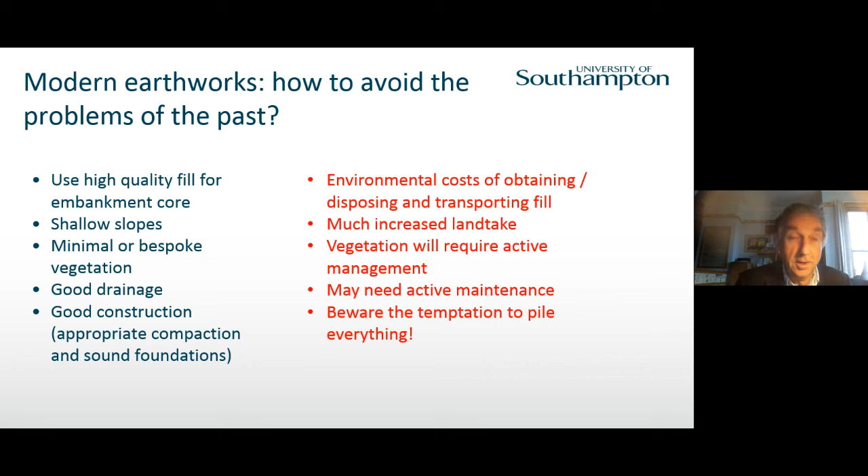So I think we know what to do, and at the moment we're probably trying to find a balance between how much of this we do, how much we put onto capital costs versus ongoing maintenance. Is ongoing maintenance such a bad thing? Very often we perhaps don't think up front about the environmental cost, by which I mean the number of lorry movements we might need to make in order to import good fill and dispose of unsuitable fill, and the number of quarries we tie up and the amount of material we use to win the good quality fill. Those actually do start to pose a challenge on a major infrastructure project.

So, by way of concluding comments, to summarise what I've said, I think estimating wet winter pore water pressures in embankments requires us to consider both the lower drainage boundary conditions, for example whether it's on a chalk, clay or gravel foundation, and the embankment permeability.

Vegetation can be managed to realise the benefits of lower winter pore water pressures without the nuisance of excessive seasonal shrink-swell. When we use discrete piles to stabilise the embankment, the pile pressures depend on the relative soil-pile movement, consistent with simple mechanisms of slope and pile displacement: a deep-seated slip, as at Hildenborough; shallow downslope movement, as at Mill Hill in the long term and at Grange Hill; and inward shrinkage due to vegetation effects, seen in the short term at Mill Hill.

Upslope pressures on the upper part of the pile may occur if we've got a stiff stratum. I suspect that had it not been for the rock fill, we probably wouldn't have seen that at Hildenborough. I think the stiffness of the rock fill was quite important in that respect, or as a result of the inward shrinkage due to vegetation effects.

Finally, modern methods of design and construction can avoid many of these problems, but we need to think about whether they're financially viable, especially if we try to front-load construction costs so we have a maintenance-free transport corridor. We also need to think about the environmental implications in terms of the use and disposal of material, not just the material itself, but also the movements and transport costs of doing all of that.